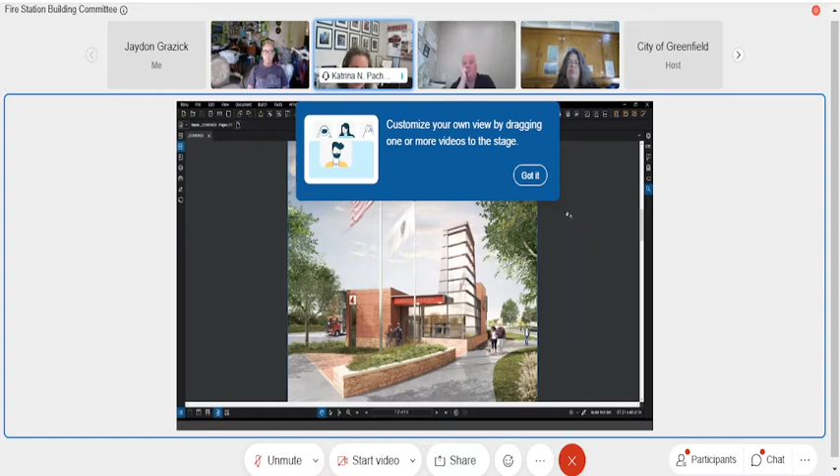So this is a bit more of a modern look. We just want to show you a smattering of different things, and most of these are in areas that are entrances to the community. We are well aware of the placement of this building on the site in your city, in your town, and how it is part of the landscape there. This particular one is also a bit modern, has solar on the top, and different elements, a lot of the bays that we're going to have.

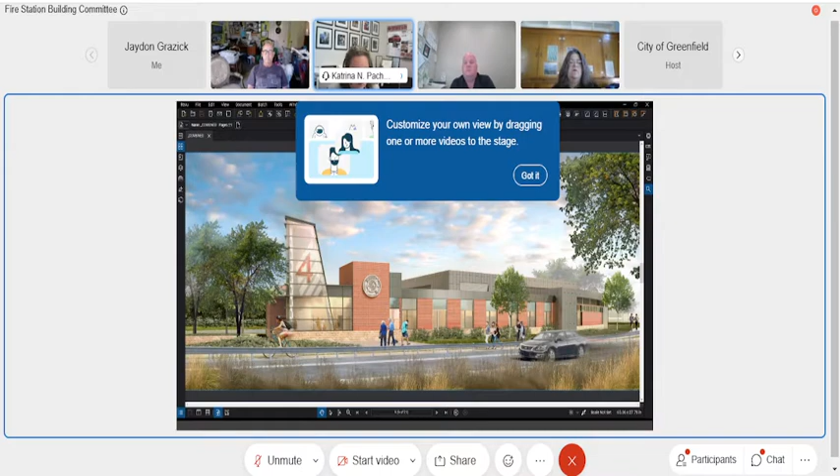Okay, keep going. This one is built as well. This is down in Princeton, New Jersey, and has some similar characteristics to one of the ways that we're leaning more towards now that we've started the design process with the chief and getting feedback for how the bays need to be laid out for operations and how the building will be laid out. And we're looking at structure. So keep going.

That's another view of the Princeton project. This one is Fort Washington, Pennsylvania. That's the inside.

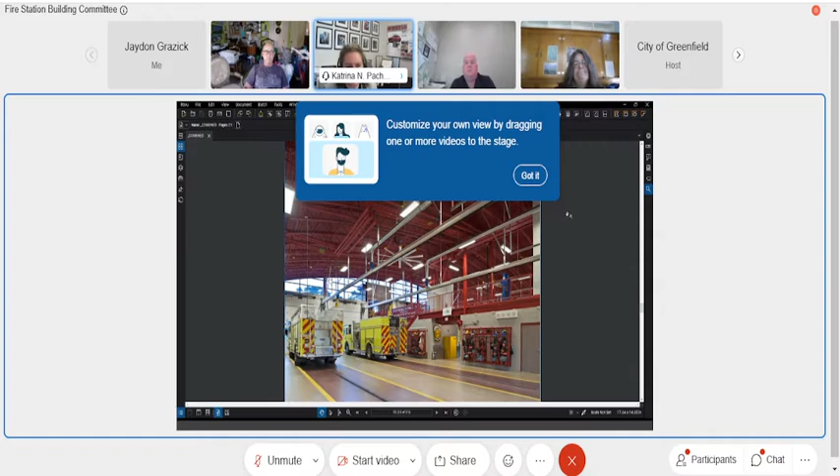This is Lexington, Massachusetts. So you can see we have a variety of vernaculars that we use in our designs. We're not stuck on just one type of material or shape. We want to make sure that it works programmatically first and foremost for the chief and the fire department, but also stands as a symbol of the community. So there are a lot of parts and pieces that go into that in recognizing not just the history that goes behind the fire department in each locale, but also the modern needs of the department.

This one is in Great Barrington, Massachusetts. And what you see on the right-hand side in that previous picture is a kind of a museum area that is a separate area within the building. So when you go in there and look at that area, you're not in the operational section, the private area or the secure area of the fire station.

And this one is in down on Long Island, I believe. Which one is this? This is Manorville.

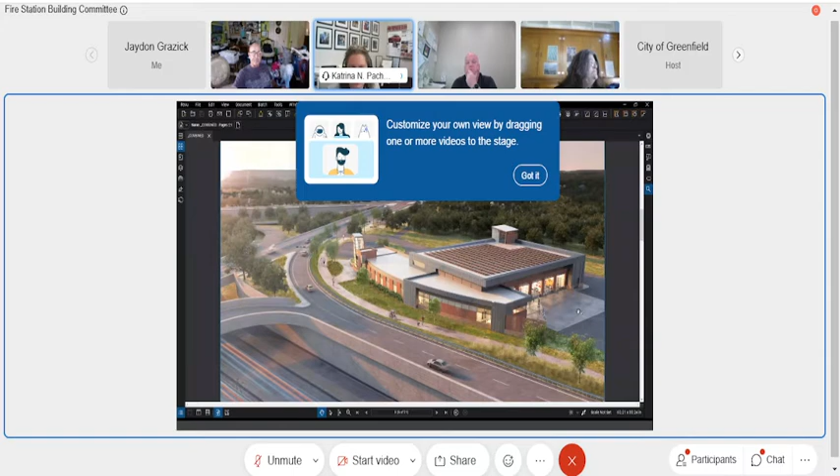Okay, so thank you, Adam, for showing those images. We just wanted to start having everyone think about it. And I will say, with the shape of the building that we're starting to come up with the chief, it's certainly leaning more towards the modern look, which you're seeing in some of these photos. So with that, was there anything else, either Dennis or Adam or Neil, you wanted to add?

Nothing from me, Kate. I'm good.

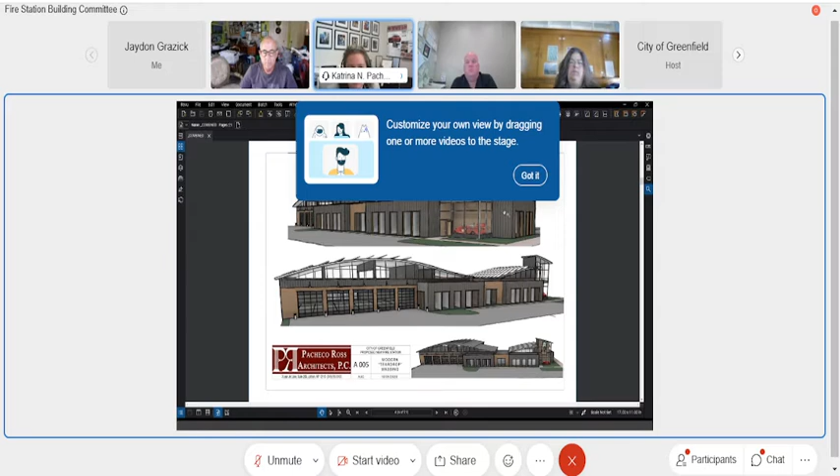Since it's not an agenda item this week, we would suggest that in a future meeting, not too long from now, that we get some discussion from your end and opinions expressed, but we are certainly leaning a certain way, and we will present what we are thinking about for discussion. Katrina, I think it might be of benefit if we could do a PDF of the presentation and distribute it to the committee so that they can review it and ponder it in their away time. And then the next time, perhaps we can have some more genuine conversations about what moved them and what doesn't, so that we can try to hone that discussion as we move forward.

Sure, and you're talking about what was just presented, correct? Please. And if you could, when you do that, cite, I know you verbally cited some of the communities, and sometimes it's very obvious on the fire stations, and sometimes it's not. So for us to be able to say, oh, I like this one, or I like that one, or think maybe we ought to combo one and the other, it would be helpful if we knew the names of the communities, or if you want to number them like you did, that's fine too. We can certainly add that to the presentation, no problem.

Butch? Just a question for Dennis, if you could just quickly speak to the process we used when we were doing the public safety complex and how he toured the town and took various pictures of buildings and tried to incorporate those into the different designs that he was presenting. It was a pretty good process he went through, just add to the discussion, that's all.

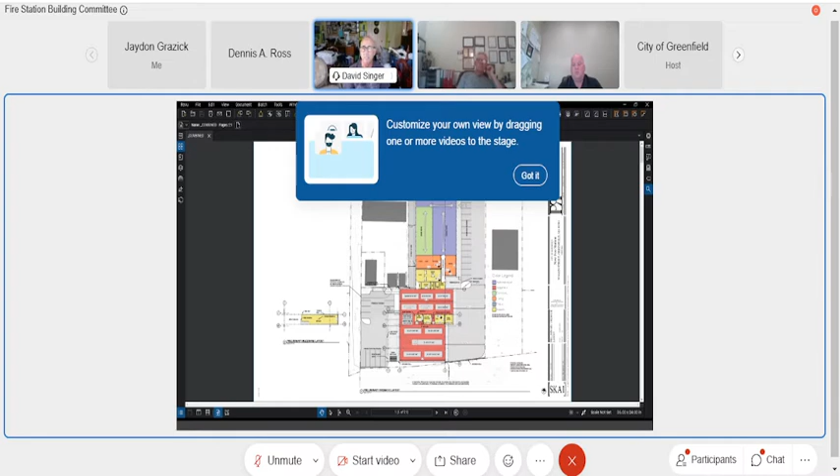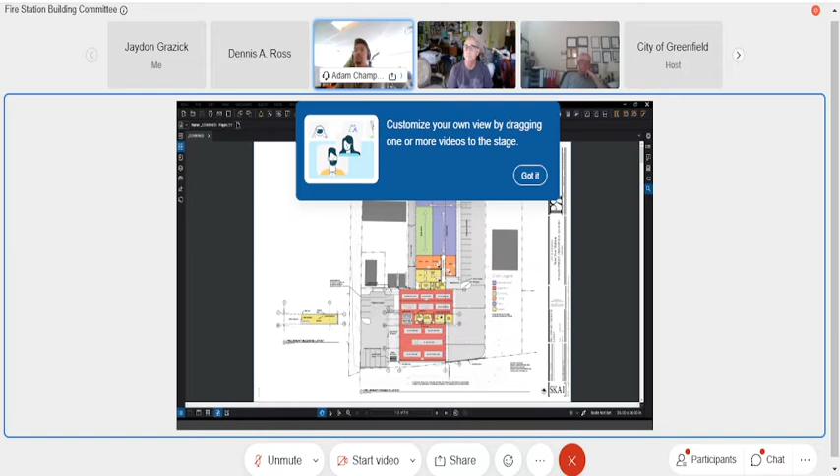Yes, Gene. I wonder if we could also have a cost analysis along with this. I mean, I want the fire station to have every single thing that the firemen need, but if swooping glass costs more than cinder blocks, and those are the two choices, I'd like to know, are we staying within budget with swooping glass, et cetera? It's a great question, Gene, and it's going to be up to us to make sure the differences are not large enough to actually affect the building, so that anything we show you is going to be close to budget. It can vary, obviously, as you say, swooping glass versus block. There are differences, but it's up to us to make sure it's relatively within budget before we even show it to you.

Thank you. Excuse me, Mayor. Ed, go ahead. Oh, I'm sorry, I didn't mean to, I wasn't trumping the mayor. I hope I wasn't. You want the mayor to speak last. Go ahead. Okay, very good.

Hey, I just wanted to throw in a comment that I've heard from a lot of people in town that they don't want glass. They're not very happy with some of the new buildings that have been built downtown, particularly the courthouse on Hope Street. So I've heard that from a lot of people, and as a city councilor, I just have to throw that in there—that constituents I've heard from do not want a big glass building. So just throwing my two cents in. Thank you.

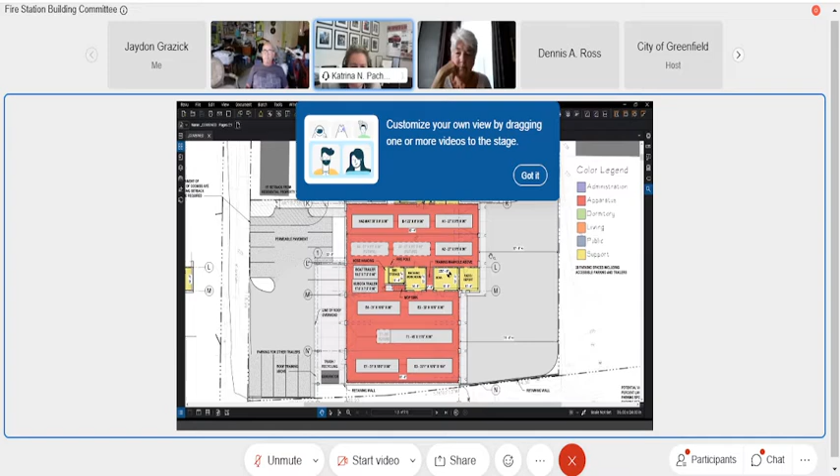So we had a great discussion with the chief. I'm trying to keep it high level here. Chief, you're seeing this for the first time since Friday. We did extend the front of the two northern bays to allow for stacking of ambulances, and we are talking about the future growth of the department in terms of vehicles, what they could have in the future, so that you're not stuck in a building and looking at 5-10 years down the road wondering if we need to add on. With that being said, we have worked with the chief and his crew to organize the spaces that make sense for them.

Now, this is just a very vanilla box. We don't have any elevation of this. This is not modeled where we can spin a 3D model in front of anyone yet because we need to work out the rest of the building. But this was the primary space, and we wanted to update the group on where we were and show that to you. Chief, do you want to add anything? No, you've hit everything that we've talked about. Thank you.

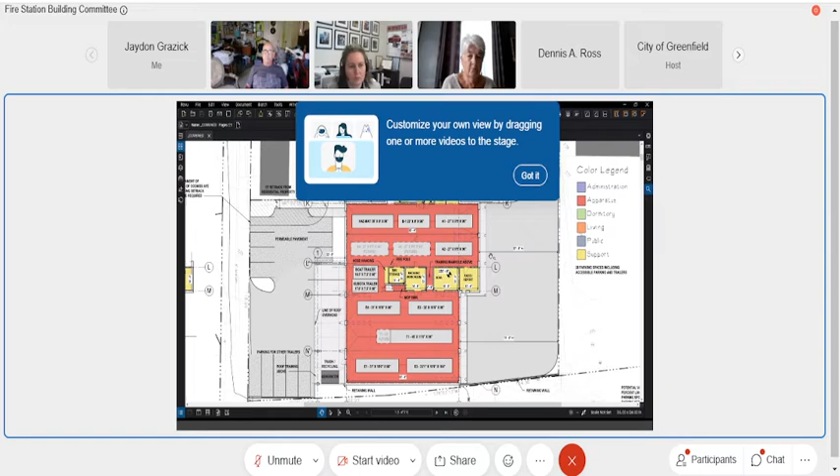Okay, Adam, if you zoom out a little bit. I know we did talk with the chief about the property. I don't know if that's something that should be discussed in this committee meeting or if that should wait until another day. In terms of the property, we're looking at the Coombs Street side, and there may have been, and I apologize for not being aware what is happening with the property to the south, but also on the Coombs Street side, whether any of that could be abandoned and perhaps added to the property.

Can you show with your hand where that might be? Adam is circling that area. To the left, south of where that residence currently is. I see, but that's the west of the property. I'm sorry, that's the west of the property, correct. So there's two pieces that we're talking about, that Coombs Street side.

And this is regarding variances that may need to be asked for on the site, for either parking or setbacks, the way it's currently laid out, and whether part of that street could be abandoned and made part of the parcel, as well as the piece of land that's to the south. And I don't know that we've got an update on the status of that.

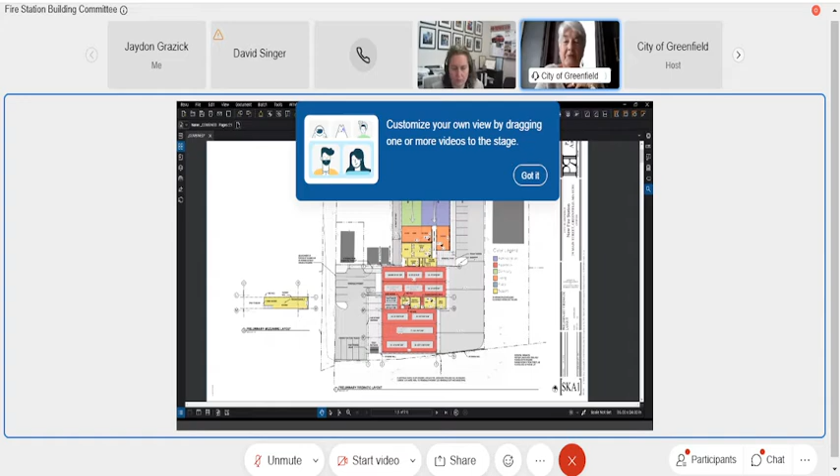Yeah, okay, and he was forwarding that. I didn't learn this till late last week, if not over the weekend. I'm sorry, I looked up the former email, which was back in July, I believe, to Mass DOT. Essentially what he was saying is we can't independently make that decision on our own, we have to go to whatever this other organization is. I didn't realize this question was going to get asked, so I don't have the name of that organization, but long story short, he did forward it on to that person, and I have yet to hear back. So I will need to reach out to that department. He did give us a contact, I believe, and we'll pursue it with them. So all is not completely lost, but the chief is correct, right now, today, it is not favorable.

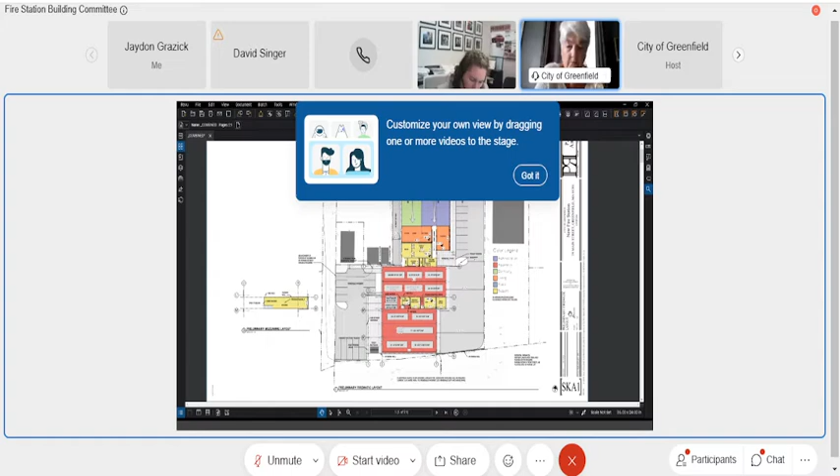Thank you, Mayor, we're losing people left and right, okay. Yep, so part of the reason I'm bringing it up right now, as you're looking at the plan on the screen, is we want to make sure that the building, in terms of footprint and the economy of the building, can fit on the site appropriately.

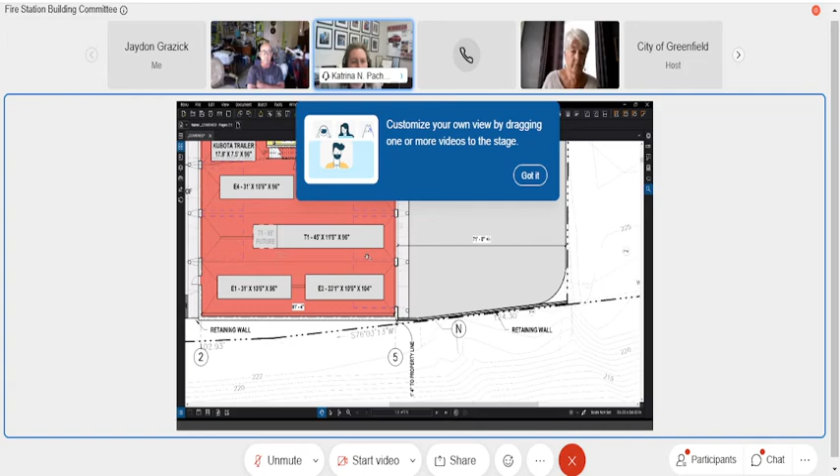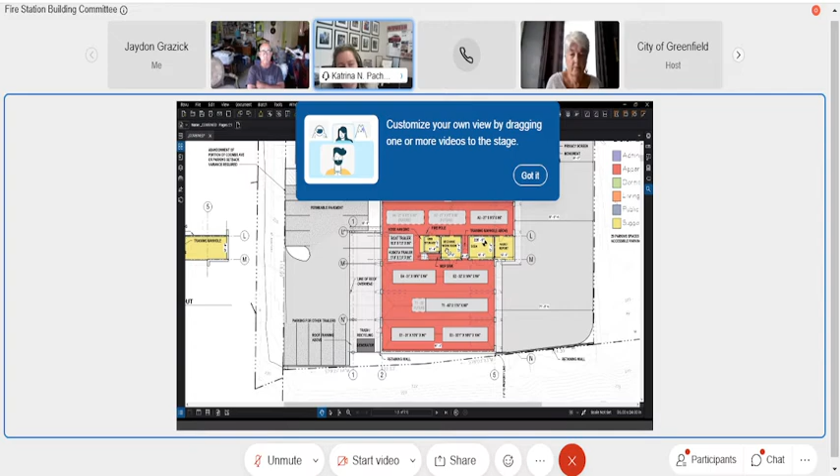If you zoom in on the lower right-hand corner of the bay, where we've placed it, this is pretty much the optimum location right now. We cannot push the building further to the east or rotate it or do any other things because of those types of site constraints. So along with that property to the south, as well as the Coombs Street side, we want to be talking about those things now so that we know in the future whether we will have some breathing room on one side or the other. Understood, thank you.

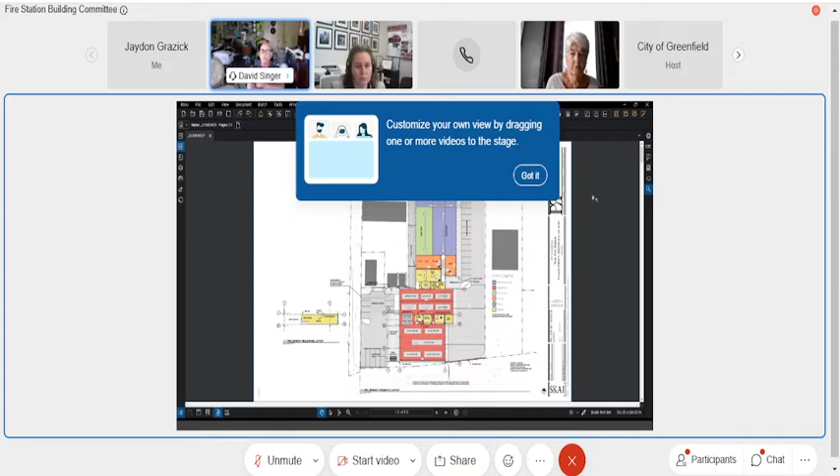So, Katrina, what you're saying is that the building area, regardless of the design around it, is pretty much set. This is the best use of the space in terms of parking, where the bay will be, and where the other parts of the fire station will be, correct? That is correct. There's really not a lot of choices we have about setting that up.

Correct. So the only thing we're talking about, which was the point at the beginning of this, was the idea of what the design itself will look like, the outward appearance, like dressing it for the day. Yes, but part of what is tempering what the look may be is the structure, and this is why I'm talking about economy of structure.

When you look at the bays, if we had all 5 bays together, we would be looking at a heftier structure. So by parting them in half, that reduces the cost. When we reduce costs like that and make the structure simpler, that allows us to spend money in a different way on a different part of the project within the budget.

And that can affect what the outward appearance is on the building. Gotcha. But to follow what Gene was saying, if on a practical level and a cost level this is the most efficient, then the next step would be to design around that rather than create a design first and then engineer it around that design, correct?

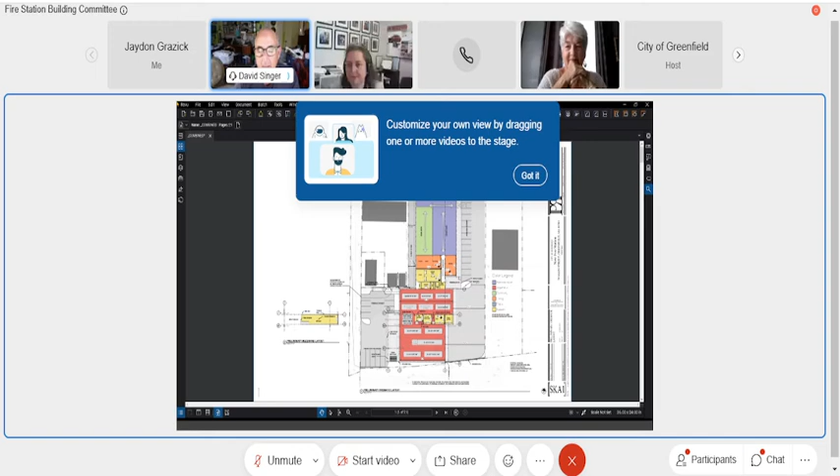Okay. All right, Adam, can you put me back in touch with everybody? I feel so alone. Okay, thank you.

Not a problem. Questions of that presentation? Yeah. Okay, I have a question since I wasn't part of the library process. If either Neil, Dennis, Katrina, Adam, the mayor, or Gene want to chime in, what exactly should the committee be looking towards over the next several months?

Is this all now like the beginning, the intro, your first day of class? And from here on, we're going to have more specific presentations in a sequence that you think is appropriate. I don't know what that sequence would be, but if anybody could chime in, so the committee could appreciate that starting maybe next meeting or the meeting after, we'll start thinking about more of the details. Can somebody please explain what's going to happen to the committee along those lines? You don't have to get too deep in the weeds, but just a general sense so we could understand what we're going to be doing.

Certainly, I'll jump in there, Chairman. We will have, as we've had in the past, somewhat of a schedule laid out so the committee will know when we're looking for specific input. As you said, today was kind of the first smattering of information about the entire design of the project. By the next meeting, I'm hoping to have a basic layout of that schedule so everyone understands we'll be looking at elevations, 3D massing, different materials, etc.